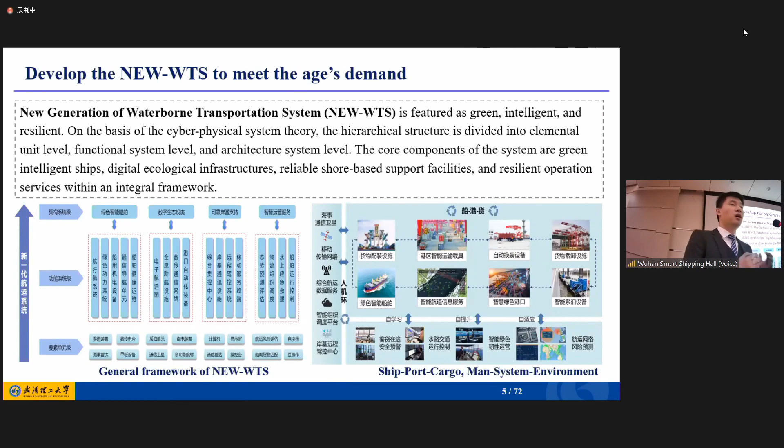From our university, Wuhan University of Technology, we expect to develop a new generation of waterborne transportation system that is green, intelligent, and resilient. We would like to share all the data among the ships, ports, and terminals, and break the barriers between these systems. We have to merge them all instead of setting up different small, separate systems.

With this expectation for shipping, we also have to know why we want to develop intelligent ships - what are the driving forces behind these technologies? We would like to develop intelligent ships to increase the interest and decrease the cost. We build ships or increase shipping to earn more money, to develop transportation and the industry. How can we reduce the cost, and how can we move people from the ship side to the shore side - that's something we need to address with intelligent ships.

In the future, we would like to move people from the ship side to the shore side, to give people a better working environment. To do so, we have to use remote control technology, etc. If we can move people from ship to shore, we can reduce the physical space needed, like hospitality and living areas for staff, so we can have more space to transport more cargoes.

As long as we can transport more cargoes, we can earn more money and make more profit for shipping companies and industries. On the other hand, with a better shipping system, we can optimize dispatching strategies, optimize the whole logistics chain, increase the usage of waterways and ships, and improve overall logistics efficiency. All in all, we would like to reduce cost and staffing needs by using remote control technology.

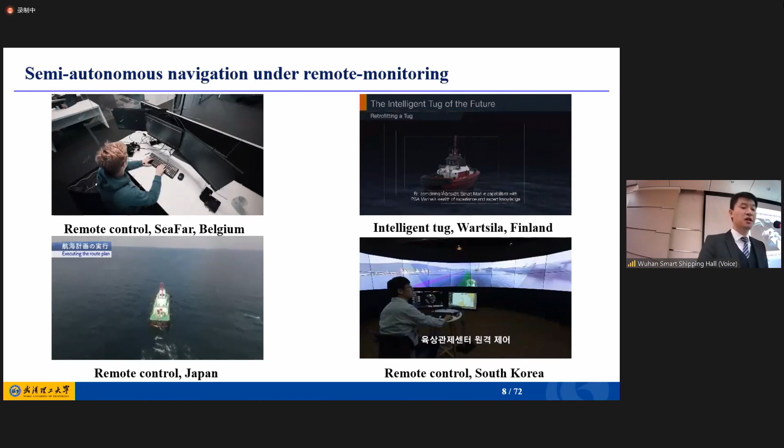Worldwide, all the researchers in this field are quite fond of these nice, beautiful ships for the future, remote control, autonomous control. Our colleagues from worldwide, like Belgium, Finland, Japan, South Korea, have done a lot of work for different types of ships and different scenarios. So what have we done for testing of these kinds of ships?

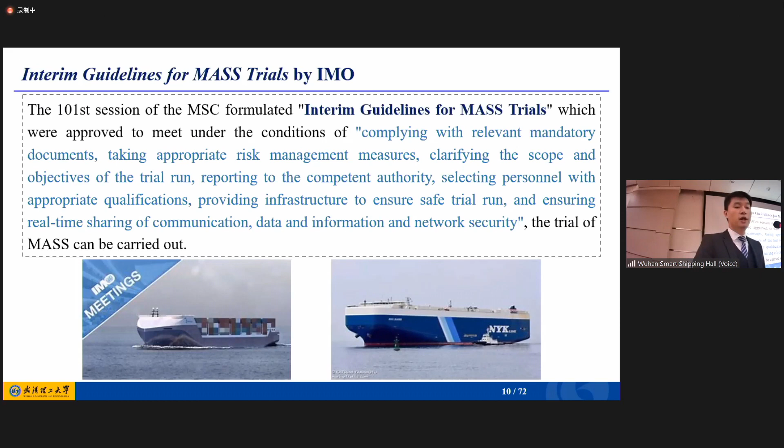Some work has already been proposed by IMO, like the guidance for MASS trials. For MASS trials, we have to be safe first of all, and we have to do some communication between different joint parties. With the IMO guidance, a lot of test beds have been constructed worldwide in different countries and different areas and sizes.

In China, we also have a lot of test sites in Zhuhai, Qingdao, Dalian, and so on and so forth. And yesterday, a nice presentation was given by Professor Kim from Korea on the autonomous surface ship project, the KASS project.

In the KASS project, they have a nice project structure, and they proposed a virtual simulation test bed and a sea test bed, both for virtual simulations and for real practical applications.

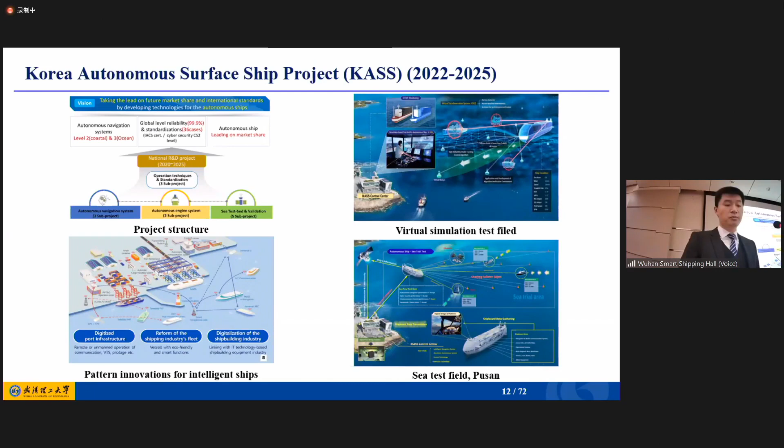But testing is not something new. It's already something that has been done for autonomous cars. Nowadays we have Waymo, Tesla. In China we have Apollo, Huawei. A lot of companies are doing these tests.

But we have to know that we also have to learn some lessons from testing for autonomous cars, because field tests, using real cars to do the test, is fundamental, but it's not everything. It doesn't suit every case, because you may have a million cars with the same size and the same brand, but you cannot have similar ships. Each ship is actually different, in different scenarios and different cases.

We learn a lot of lessons from testing of autonomous and automated cars. We have to set up scenario-based testing and functionality-based testing, which means we design some scenarios for different perspectives, like navigation or collision avoidance. We also have to design functionality-based testing—if you want to test the function of a radar, or the function of a controller, and so on.

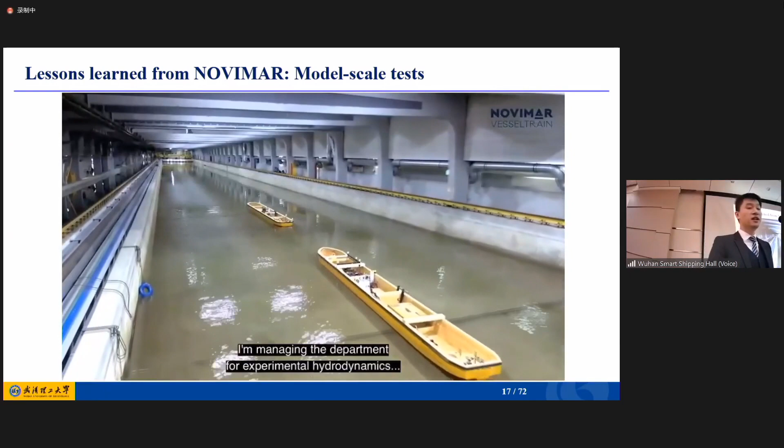After proposing this concept, some virtual simulations were done by MARIN and other partners, using software-in-the-loop or hardware-in-the-loop simulations. Afterwards, some model-scale tests were done by DST in Germany, and these model-scale ships were tested in the towing tank, where you can see the two ships following each other.

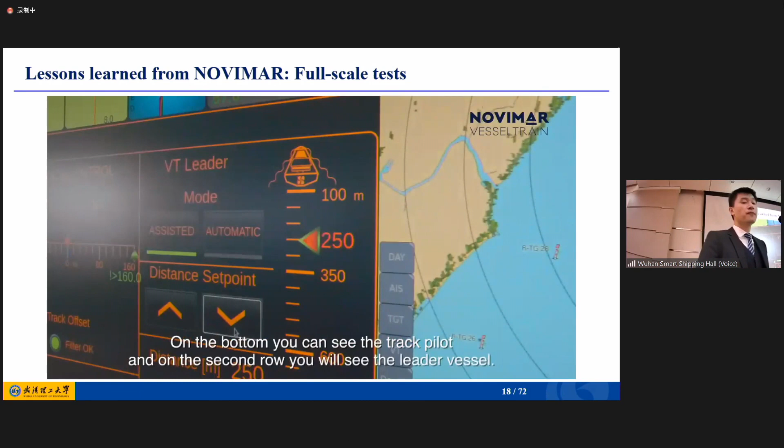In the end, the NOVIMAR project ran some full-scale tests with cargo ships, and one cargo ship with another cruise ship. So all in all, they proposed the concept, set up some virtual simulations, did some physical tests with model-scale models, and in the end ran some full-scale real ship tests.

In the third part, I would like to tell you something about testing for intelligent ships—what techniques, what software, and what hardware we need to use for testing.

In China, at least our group, we focus on testing based on the Rules for Intelligent Ships 2020, proposed by China Classification Society, the CCS. They have already set some functions or requirements for different functionalities of intelligent ships, like smart navigation, remote control, or autonomous control, etc. That is the foundation for our testing.

We also have some challenges and problems for testing. How can we secure safety?

Because you may test a ship with some software that you don't know, how can you guarantee the safety of your own ship and the environment around your ship? How can we improve the efficiency of testing? Because real ship testing can be really, really expensive.

We also have to reduce the cost and increase the coverage to guarantee all the tested scenarios, different ships, different ship types. We also have to improve the reality or fidelity of your simulations. We also have to consider some emergency considerations. If something goes wrong, what should we do? With all these challenges and expectations, we have to think what techniques we have nowadays.

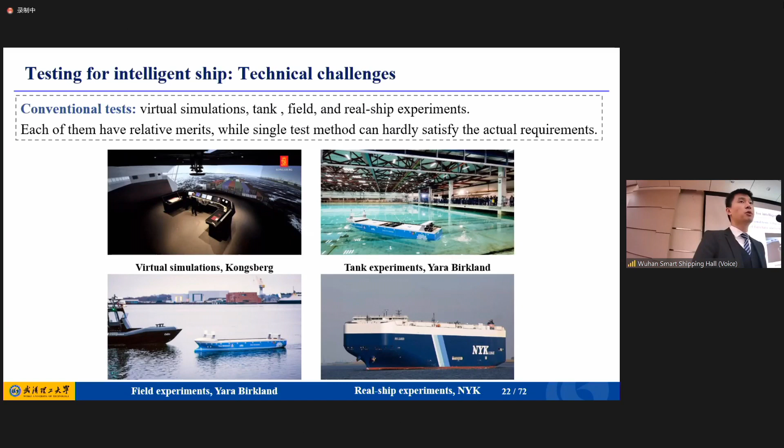So, we propose some concepts. How can we do the testing for intelligence? First of all, you have to do the test. It's something 0 or 1. Do you have a real function here, like course planning, course keeping, avoidance decision? If you have this function, it's 1. If you don't have it, it's 0. On the other hand, if you have a lot of functions, all these functions can be merged together to form some task-level functions. You can merge course planning, course keeping for autonomous navigation, etc.

Moving forward, you have the method level. If you want to fulfill the task, you may have some maneuvering models, course planning algorithms, control algorithms, etc. You have to verify this method. It's a yes or no question. Furthermore, you have to do the evaluation. Is that good or bad? Is that smart or not smart? So for the performance level, you have to consider the algorithm accuracy, the functional switch, navigation safety, efficiency, etc.

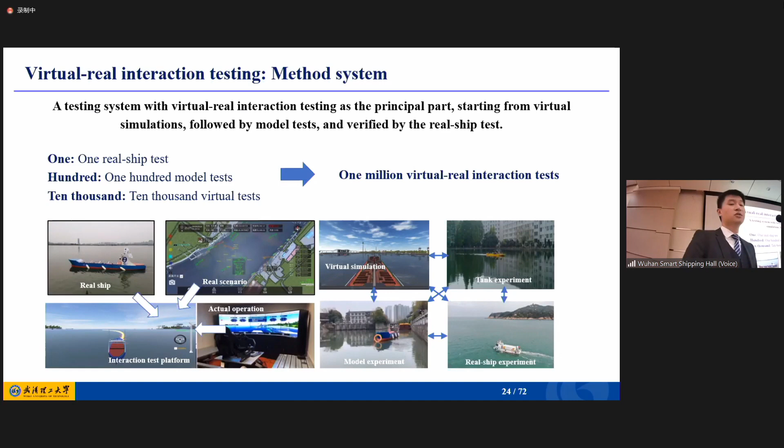So here in Wuhan, we propose virtual-real interaction testing because, like I said, each virtual simulation or full-scale test may have its own cons and pros. So we expect that we do 10,000 virtual simulations, run 100 model-scale tests, and in the end, we run one real ship test, and we merge all the information and data we generated during these simulations or tests to have this kind of 1 million virtual-real interaction tests.

But we have to consider what we test and what we don't test. We may focus on the autonomous navigation system and the communication network. We test the software and the hardware during the navigation areas. We do not test the parameters of the sensors. The limitation of the sensors will not be tested. We won't test the human factors in this kind of operation.

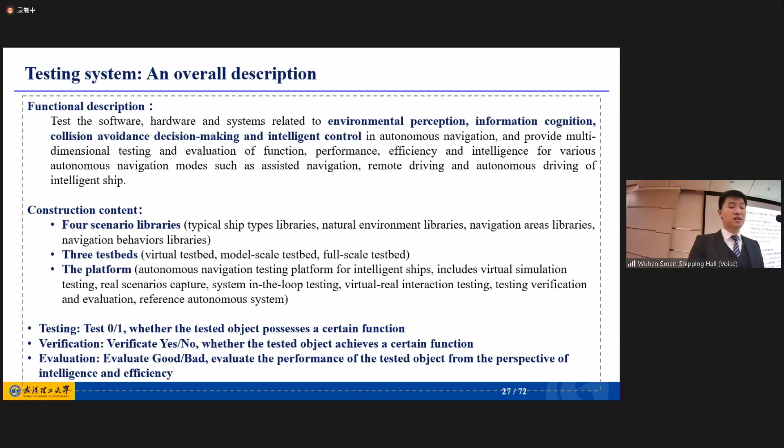So in the first part, I would like to tell you something about our in-house system for testing. There are a lot of words here, but all in all, we would like to generate 4 scenario libraries for typical ships, typical natural environments, navigation areas, and navigation behaviors like crossing, overtaking, etc. We would like to build up some test beds, like a virtual test bed, model-scale test bed, full-scale test bed. We also would like to construct one platform to merge all these scenarios and test beds. So these are the components or structure of our system.

You have different ships, different natural environments, wind, current. You have straits or near shore, coast, far sea, and you may have different behaviors, crossing, overtaking, and you have different test beds. You can use different test tools, and we develop our own models, our own navigation system to connect with other software. You may use software-in-the-loop, hardware-in-the-loop, human-in-the-loop testing methods, and you run some evaluations and display your results. This is the concept of the components of our system.

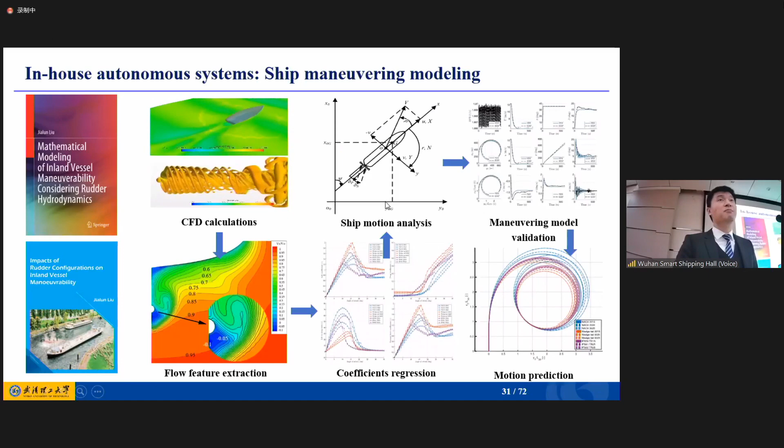How can we do that? We have 6 steps. First of all, we would like to build in-house software to run the autonomous navigation. So we develop the system from maneuvering modeling. You analyze the hydrodynamics, you build the models based on which you know the forces and the motions of the ship. We design the structure of the functions.

You have to use some data from the ship and the weather. You design the controller and the collision avoidance system. You have the PLC controller to connect your system with the actual propeller and the rudders. We also design some route planning and efficiency evaluation for long path evaluation, like the weather routing, etc. You have to consider the fuel consumption.

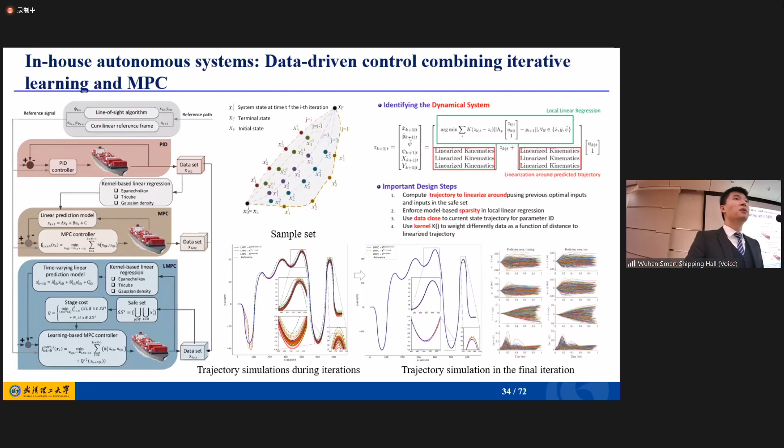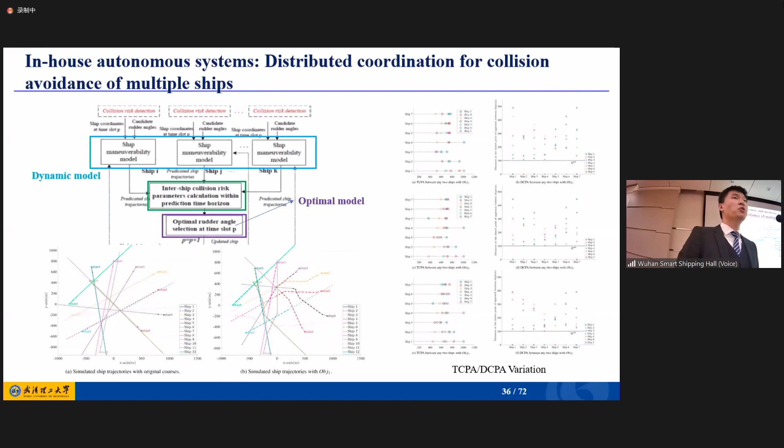And we analyze a lot of different control methods, like the traditional PID or MPC methods. We also use some learning based methods, like the learning based MPC, or the Koopman operator, or dynamic mode decomposition, all those kinds of learning neural networks. So with different control methods, we can also do collision avoidance among multiple ships, because 1-to-1 is easy, but 1-to-3, 1-to-4, or 2-to-2, all those kinds of scenarios are quite challenging.

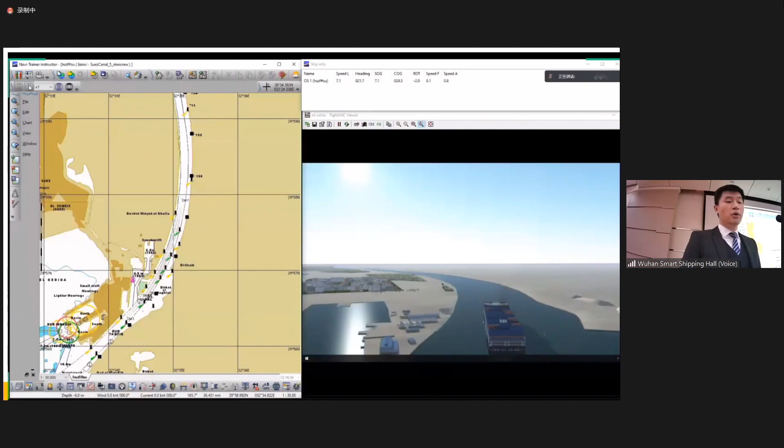And this is the result we analyzed. As you can see, we still have some pitfalls in the system. The speed of the ship decreases, and we use the rudder like 4 times more than the real captain does. So we control the rudder like 200 times, but a real captain will only use the rudder like 50 times. So the system is not yet smart, but it's functional.

Second part, we have to analyze the testing scenarios. For testing scenarios, we can set some testing scenarios based on the exhaustive method. You can list all the possible cases. You may also set up some extreme scenarios. You may set a scenario based on navigation practice. And we have to select and make some drawings from these kinds of scenarios.

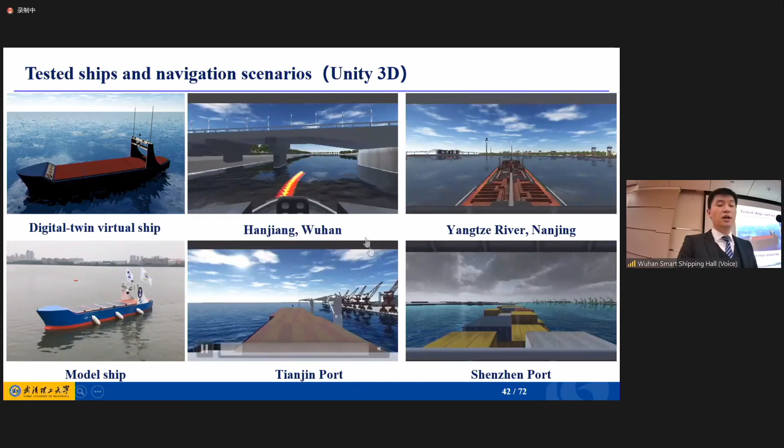This is some scenario we build with Unity 3D with visualizations, like the open sea or the towing tank in Wuhan University of Technology, some inland testing scenarios or offshore testing scenarios. We can also build this kind of digital twin virtual ship. And this is the model scale ship. These kinds of simulations can be performed with our Unity 3D in-house software.

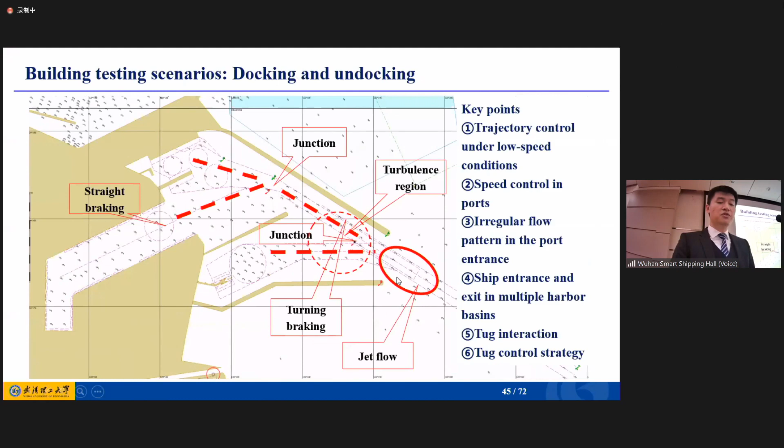We also have some scenarios set up based on the real inland waterways, like somewhere in the Yangtze River, where you have the ferry line, you have the bridges, you have large course changes, and we can also use the Transas NT Pro 5000 software to run these kinds of simulations. And another case is for the harbor entrance and the docking and undocking. You have junctions, you have disturbance from jet flow. This is also quite challenging. And we can perform this kind of simulation to see if you can control a ship into the harbor.

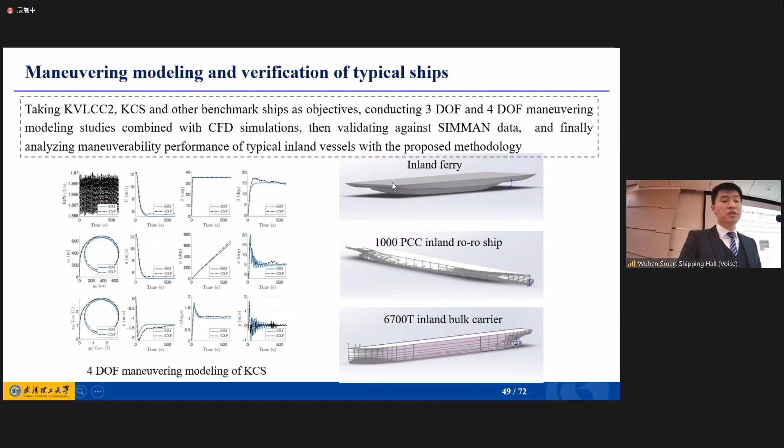So after the scenarios, we have developed testing tools. We analyze a lot of different ship types: inland vessels, ocean-going ships, tankers, cargo ships, containers. We build the mathematical models to provide the motion predictions, and for simulations, we have this Transas marine simulator for full mission simulations, and we have full benchmark ships for different types of ships and different scenarios.

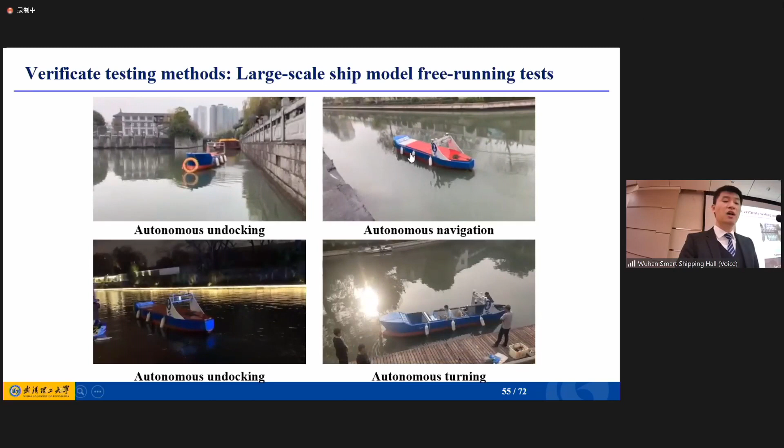And in the end, we have to verify the methods. We constructed a lot of different model scale ships. We have 5 ships: tankers, inland containers, ferry boats. And we have the tugs, inland containers. This is something we do in the towing tank in our university. We run some model scale tests in Nanjing. In Nanjing, the Qinhuai River is a famous place of interest. We do docking and undocking and autonomous navigation tests at model scale.

We also have to propose the evaluation method to compare your system, the software, with the human. Is your system smarter than people or not? So it's a qualitative evaluation. You also have to compare your system with other people's systems. Is your system better or worse than the others? We have to use some kind of evaluation method to give a score or a result. How much score can you get? We propose this kind of Turing-based evaluation, which is traditional for testing an AI.

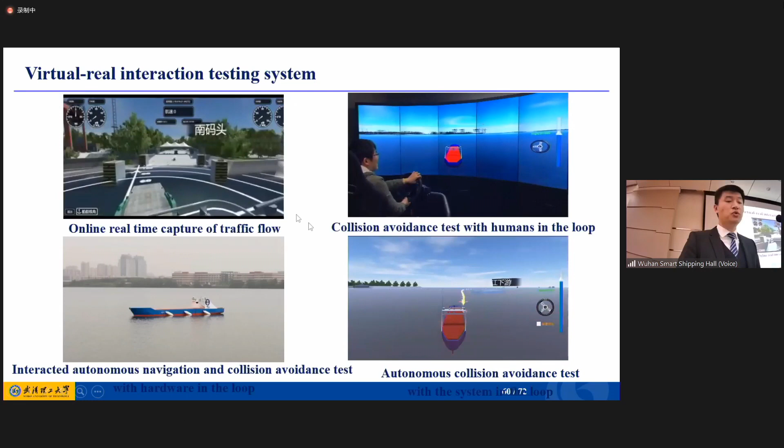In the end, we propose some demonstrations. This is a PhD student in our group. He is driving a ship through this waterway, avoiding other ships. If he can sail this ship safely, he is a good captain. If our system can sail the same ship in the same environment safely, the system is roughly okay, or at least okay for this scenario. That's something we do in the end for this kind of virtual-real interaction testing.

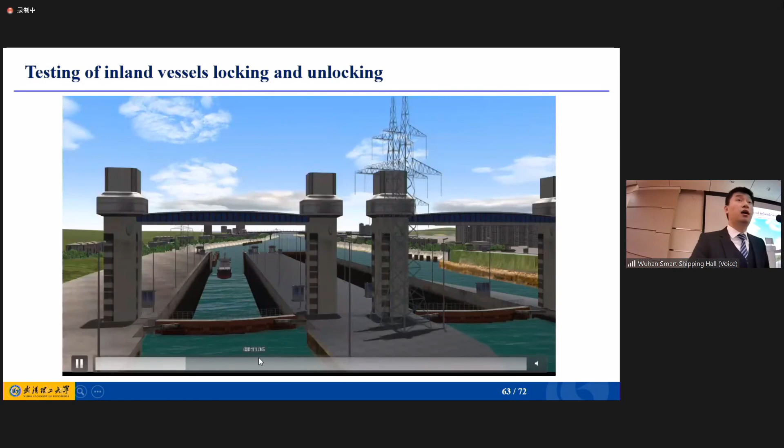And this is also something we do with the simulator. We use different test scenarios for locking and unlocking. We use something like the ship's vessels entering the lockage. You can also test your algorithms to see if you can do this job. And we can also maybe perform some kind of formation control test. You have different boats, and how you can test your algorithm is also something nice we would like to do.

And in the end, we still have a lot of pitfalls. All those points are something where we are worse than the commercial system, but we also have some flexibility compared to the commercial systems. All in all, we have already had some good results, some publications, monographs, and a lot of PhD students and master students are working in this area. We are supporting a European Horizon 2020 project called SAFEMODE. Using our system, we will run some tests for operator assessment of remote control ships.

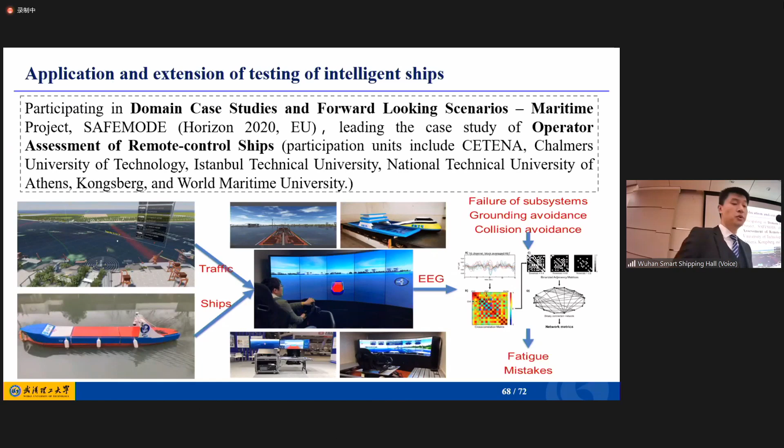And this is the last slide in my presentation. We have some experience. If you want to test your ship, you have to know how to design and construct an autonomous system. It's strongly connected to each other. If you don't know how to design the system, you don't know what you would like to test. And in the end, for the researcher on testing, we have to answer the question: is your system safe enough to drive a ship? And how much work can the system do for humans?

And we are experiencing a lot of opportunities, because nowadays we all want ships to be green, intelligent, and safe. So there is a lot of work to be done. We have a lot of new research areas like remote control, unmanned control, autonomous control, ship-shore coordination, formation control. A lot of work has to be done. And testing is something really connected with our R&D and device design.

And in the end, we also have a lot of challenges. There is a lot of work to be done for testing. We need a lot of time, a lot of money to be invested in this area. There are a lot of difficulties in modeling, testing, scenario definition, scenario selection. And we also have a lot of difficulties with communication and collaboration. We have to understand other parties, how do they design their system? How do they think about autonomous systems?

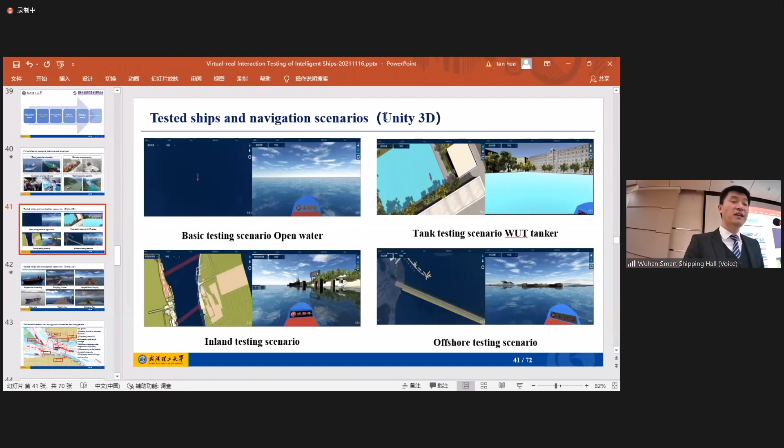Actually, I cannot give you an exact number because we design the scenarios for different purposes. Actually, we have two kinds of systems. One is with Unity for visualization, developed by our own. So in this system, we have like 6 or 8 scenarios. These are 4, and these are another 4. And for some scenarios we constructed with the simulator system, there are hundreds like that. We can set up the scenarios as we expect. So actually, there are a lot. Hopefully, I answered your question.

That's okay. So I have one question to add to his comment. From my point of view, and maybe from your point of view, how many scenarios do we need to carry out to test and prove the system's capability? We need to test to check the autonomous system and the collision avoidance system.

Thanks for the question. At least from my perspective, I would expect at least one or two full-scale experiments as the final stage for testing a system. But before that, we would like to do at least about 10,000 simulations virtually with a simulator or an in-house system. And you may reach 10 to 100 model-scale tests to verify the results of your simulations and to connect the data from virtual simulation to full-scale experiments.

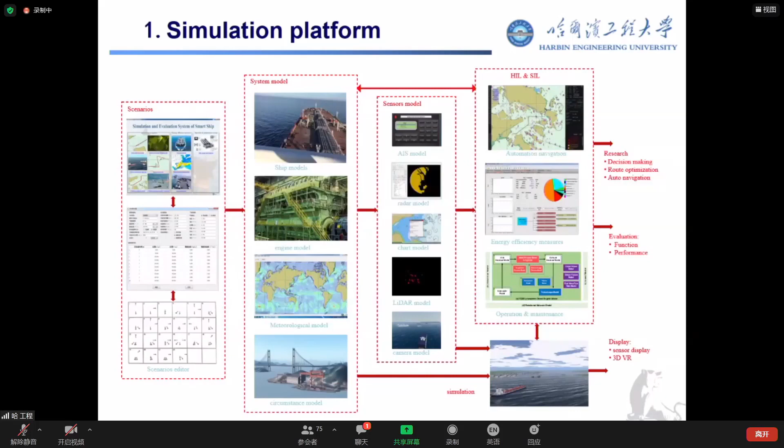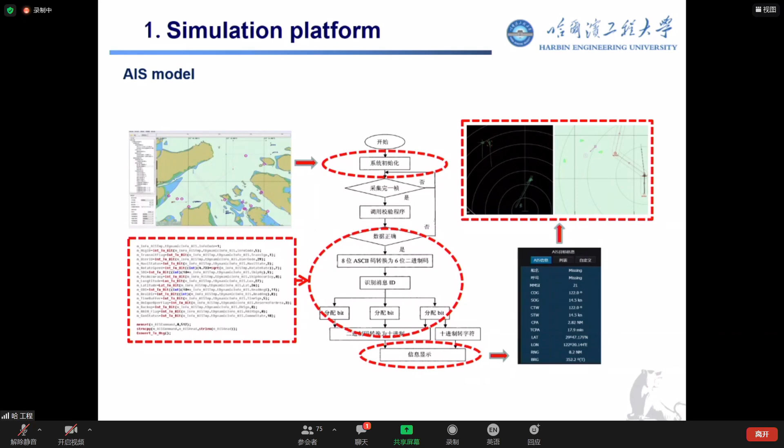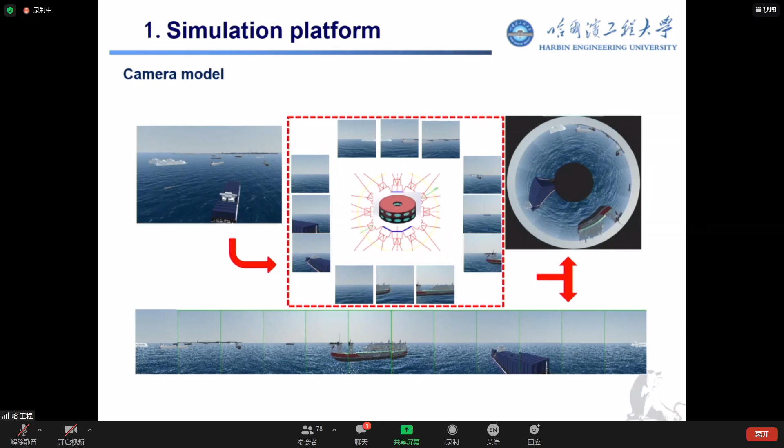The second part, I will introduce some test equipment developed by our team. The first is the omnidirectional vision system. We use 12 cameras and 12 infrared cameras joined together like this. We have designed a special embedded system for image acquisition and processing.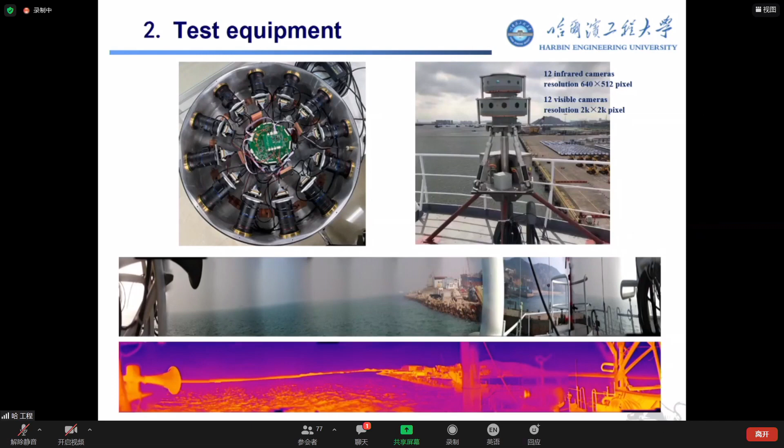This is the final omnidirectional imaging after stitching. We can see that the stitching algorithm needs to be continually updated. Okay. There are some application algorithms and programs developed based on the panoramic vision system: object recognition and classification, and image enhancement algorithms for rainy and foggy days. In sum, this is the continuous work about image processing.

Another equipment is about LiDAR, panoramic LiDAR. We use a LiDAR with 128 lines. The vertical angle is about 12 degrees. The range distance is about 2 nautical miles, with a 2-layer receiver. We used more than 2 years to develop the system, and now it is in the testing stage to test the performance of the system. At the same time, we have developed software for object detection and classification under the point cloud.

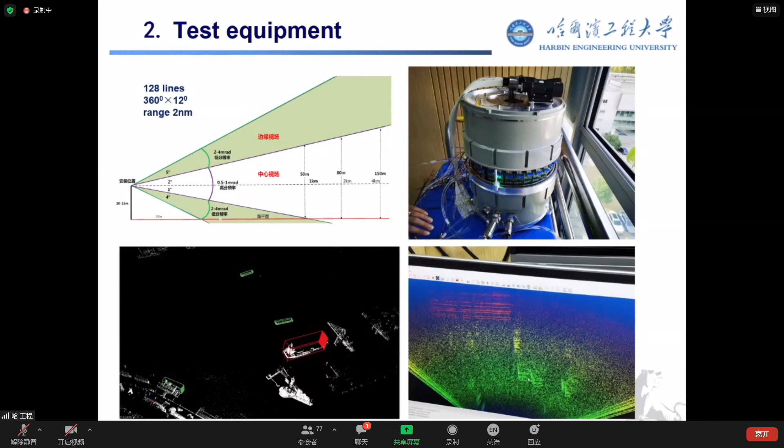And this is another kind of LiDAR system with a narrow view angle, only 2.56 by 2.56 degrees, and with 64 lines. The ranging is also 2 nautical miles, just in testing. With this electro-optical system combined together, we can realize more detailed object detection and classification. Okay.

Another important equipment is that we have built a new ship. This ship belongs to our team. It has some advanced devices, for example, a differential positioning system, optical fiber INS, DP system, active roll reduction system, engine fault diagnosis system, the situation awareness system, remote control center, and autonomous navigation system. All the systems were developed by our university. Okay.

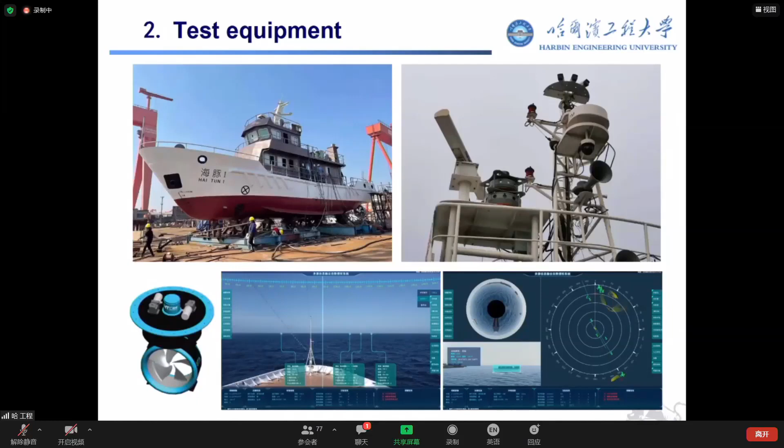I think that remote control is a more effective control mode today. So we have built 2 remote control centers, one located in the Qingdao campus and another in the Harbin campus. And 2 harbors and docks in Qingdao and Yantai can provide the test circumstances. Okay.

The third part, a very interesting problem, is about the control algorithm. This block is about adaptive control, heading adaptive control. It's a structure of hybrid model reference adaptive control and self-tuning control. Here shows the result of the controller for heading keeping and heading changing. Statistics about the result, about accuracy, rudder angle changes under different states, show it is an effective controller.

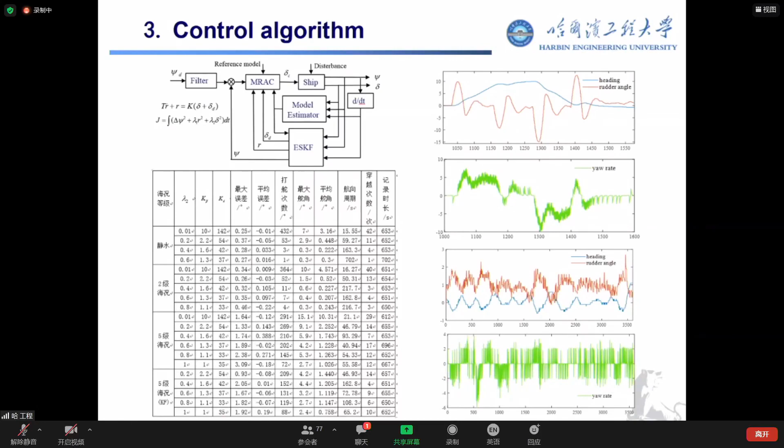And the other part is a virtual entity, a computer-generated representation of the real system, for example, simulation, modeling, optimization, data management, etc. We have just introduced two parts. One is the test equipment, as the physical entity. And I have introduced the simulation platform as a virtual entity. So we have the conditions to do research on digital twin systems.

There are two direct connections. First is from the physical entity to the virtual. We can use the physical-to-virtual connection to optimize and update the virtual system. The other connection is a virtual-to-physical connection. It's very important. It closes the loop between hypotheses generated in the virtual and the real entity. So effectively, the digital twin with both connections generates hypotheses and subsequently performs tests and adjusts the hypotheses in a continuous adapting and improving cycle.

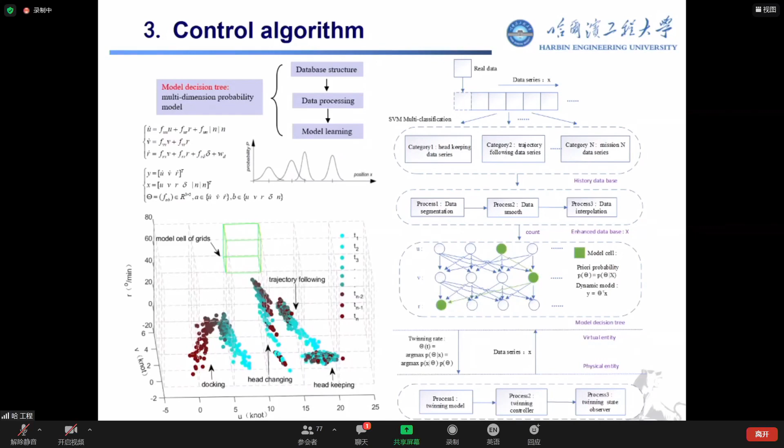This is the new idea for the effort. That's all about my report. Thank you.

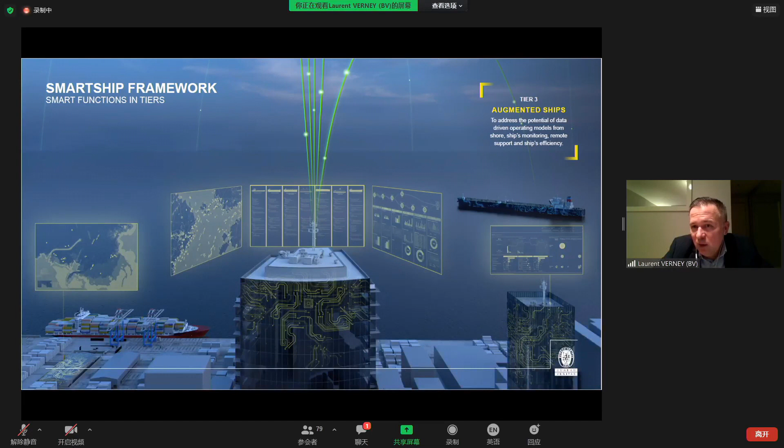After that, what we consider as the third tier is the communication in the opposite direction. It means that you are able to bring some support, but the support is not from the crew, but from the shore this time. This is what we call remote support, or what can be summarized as augmented ship. And then, when this support - I mean the prediction and so on - can be directly provided by the system on board, this is for us when the ship becomes really autonomous.

In order to rephrase all this, I will try to re-explain the 4 tiers in one single slide. As you see, to reach the autonomous level, you need to have real-time monitoring on systems, be able to have some predictive capability, some automation on board, and of course, the relevant remote access.

So to do that, first you need a computer-based ship for the collecting of the data. Then this data is transferred as your ship is confirmed to be a connected ship - you have the arrow in green with the transfer of all the bytes to the shore. Then all this data is analyzed in order to make some prediction and bring some support from the shore, rather than from the ship. This is the yellow arrow with some remote operation.

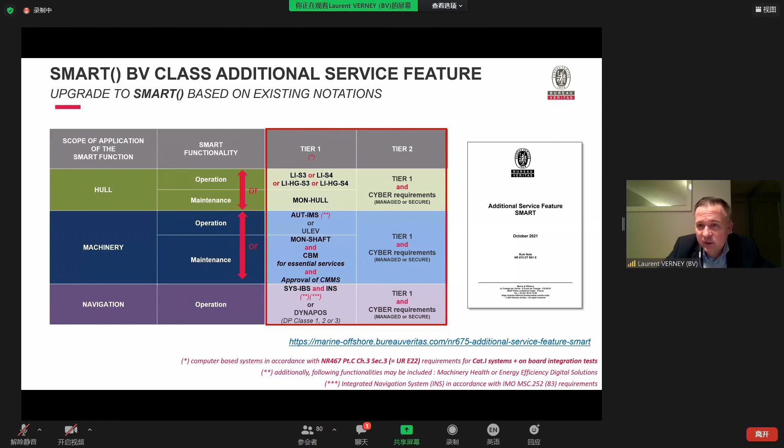Finally, since tier 3 and tier 4 are not yet published, all this will rely on the project you are currently delivering, or the research project in which we are involved. To give you some indication of what we can deliver on the R&D projects you are involved in, I would like to first present what we did with Seaowl about their concept, which they call ROSS.

ROSS means Remote Operated Services at Sea. Again, there is a link on our website to see the approval in principle delivered this year to this ship, dedicated to support at sea. We have completed the first phase, the proof of concept phase, and we are starting a new one in which the French flag will be involved, because it's important to be in line with all the statutory requirements and what may be proposed by the IMO.

So this is an example of the real development project that may exist for tier 3, I mean for remote operation. For the fourth level, the ultimate one, the fully autonomous ship, it will of course start with smaller ones.

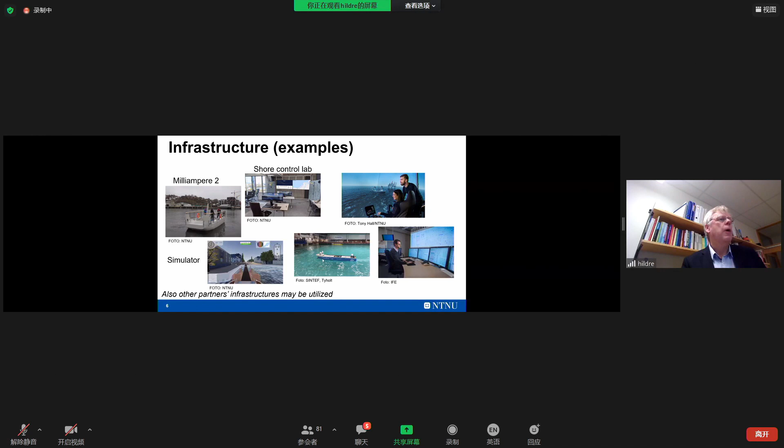There are 4 use cases: deep sea bulk shipping, short sea container shipping, urban ferries, and offshore support operations. Simultaneously, we are also building a lot of infrastructure at universities and research centers to deal with these challenges. Here are a few pictures from SINTEF, from NTNU, and so on. This is one of the examples, Yara Birkeland. It is a container vessel. I can show you a video.

This container vessel will replace trucks. That is transportation between two harbors like this. And it is an autonomous ship that will replace this huge traffic between these two points. And the ship is designed, equipped, and it will be up and running from next year.

It is 100% electric. It will be without any manning. It will be manned in 2022, but later on it will be without any people on board. And even the harbor operations and everything will be automatic. This is a kind of significant research project put into practice between these harbors actually.

And you can see it is fully automatic between these harbors and so on, with collision avoidance and all these sensor systems and so on introduced. This video is also on the net if you want to go deep into what they are doing and so on.

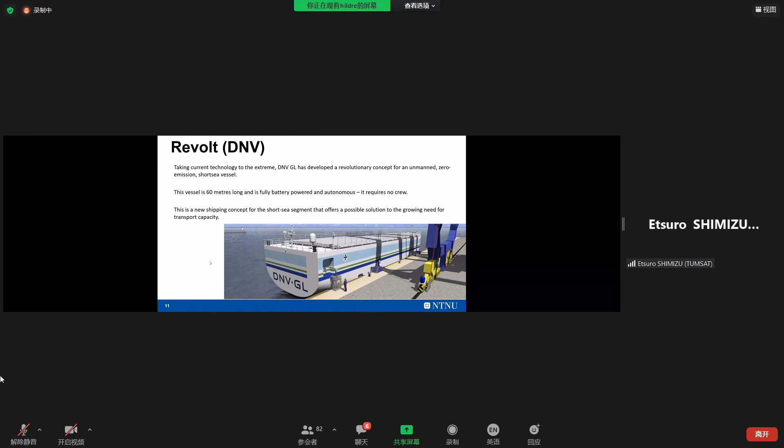Thank you. This is another example from DNV. This is also a kind of revolutionary design, an unmanned, zero-emission short sea vessel. This is a 60-meter long ship that is in research. Then there are quite many research projects ongoing, making these smaller USV ships that are in testing in the fjords around Norway, testing verification and functionality of autonomous ships. I think there are 5-6 projects like this in Norway at the time.

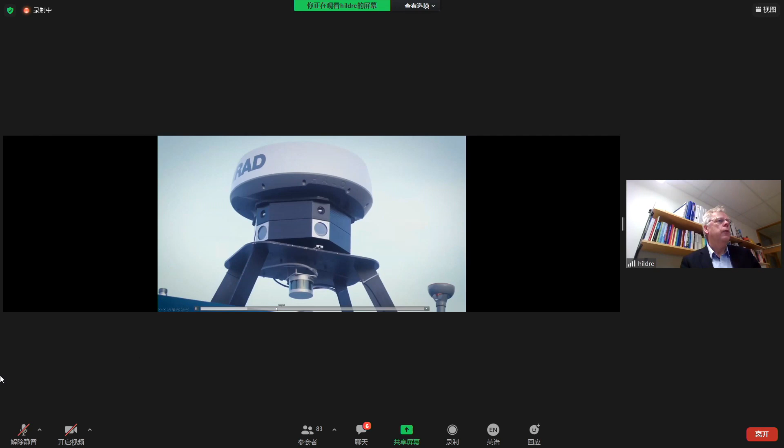This is a project called Zeabuz. It is a zero-emission autonomous urban mobility. The idea is that it is quite expensive in bigger cities in the harbors, and how we can make urban mobility in this. And this is also built and tested in Trondheim. So it is a ship that is moving back and forth, and it is up and running in Trondheim harbor at the time. So I think it is very important to do this type of testing and verification.

As you know, the IMO definitions of autonomy have four levels, and in the first two levels the people are on board. In the next two levels the people are not on board. Now we have been working on digging more into these first two levels. If you have an axis of time and an axis of number of ships, I don't put an exact time frame on this, but I think it is quite obvious that the most development in number of ships will be in level 1 and 2.

Level 2 is remotely controlled ships, but with seafarers on board, first of all people taking care of the engine systems and so on. The number of ships that are fully autonomous without any people on board, at least in the short term, will be fewer. So now we have been putting a lot of effort into these first two levels.

And we call this how we can get distributed maritime capabilities. What is the crew doing on board and what is the crew doing in shore centers? We call this how we can make these dispersed teams that are partly on board and partly in control centers.

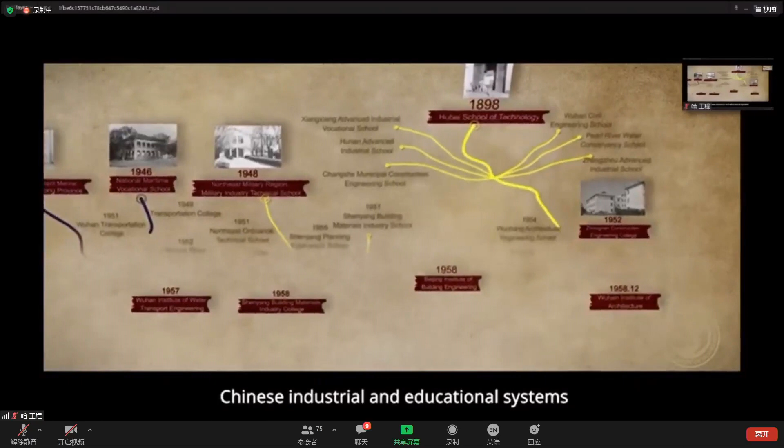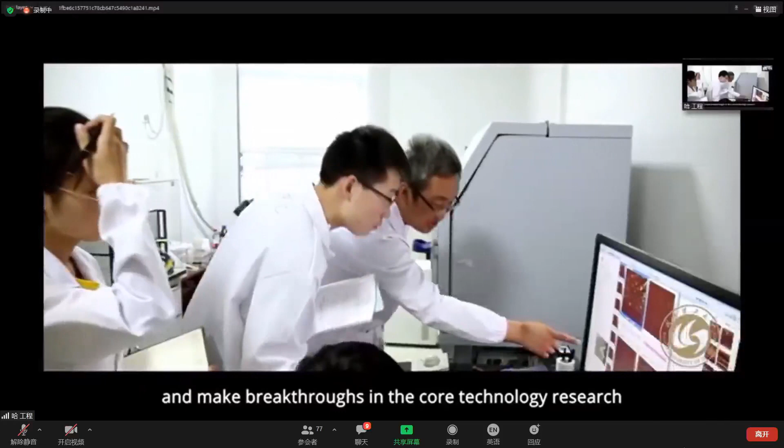Adhering to the concept of technological innovation, efforts have been made to carry out original innovation and make breakthroughs in core technology research. A large number of high-level scientific and technological achievements with originality and social influence have been yielded. A series of original results in the cutting-edge field at the intersection of material science, energy and life sciences have been published in the world's top academic journals and cited by more than 115,000 researchers worldwide. More than 50 research groups in developed countries have followed up on these researches. In 2018, as national statistics showed, WUT ranked 17th in the total number of 3 national awards for scientific and technological achievements among all Chinese universities.

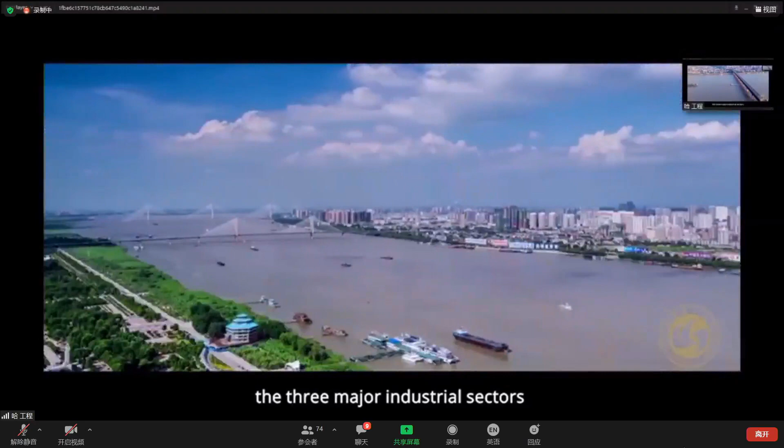WUT focuses on transferring scientific and technological achievements into social productivity. It has made great contributions in serving major projects, the transformation and upgrading of the 3 major industrial sectors, and the development of regional economy and society.

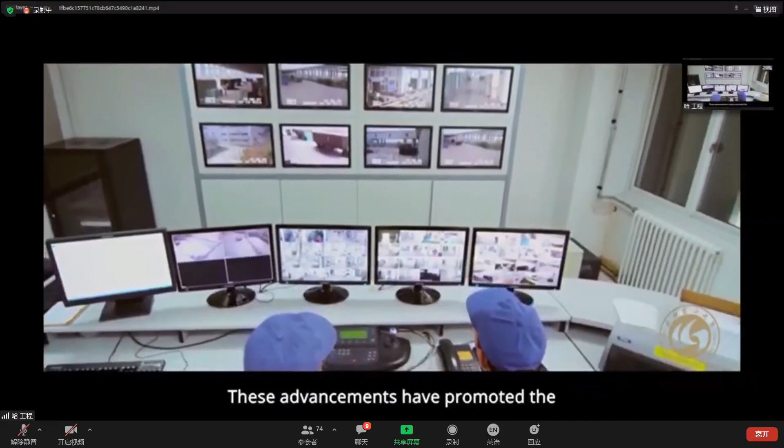A number of important innovations have been achieved in green building materials, new energy materials, electronic information materials, biological materials, and new marine materials. Major breakthroughs have been made in key technologies for the large-scale use of solid waste and domestic waste as alternative raw materials to produce high-performance cement. These advancements have promoted the transformation and upgrading of China's cement industry.

Achievements in key technologies have been widely used in more than 150 major national projects such as large-span bridges, tunnels, high-speed rail, highways, and the Three Gorges Dam, etc., and made significant contributions to the development of China's building materials industry.

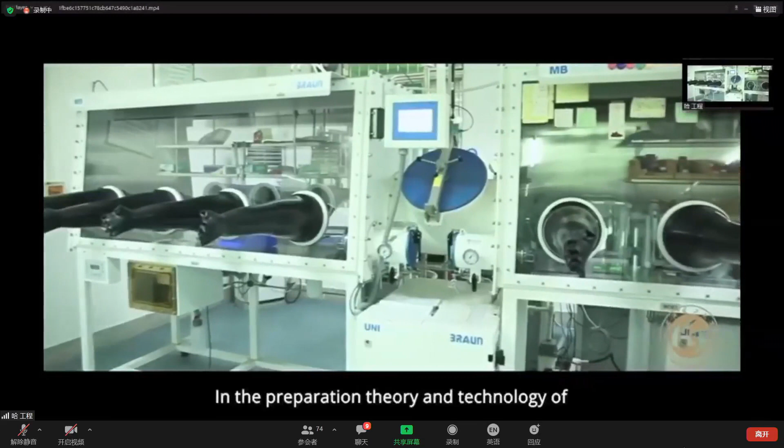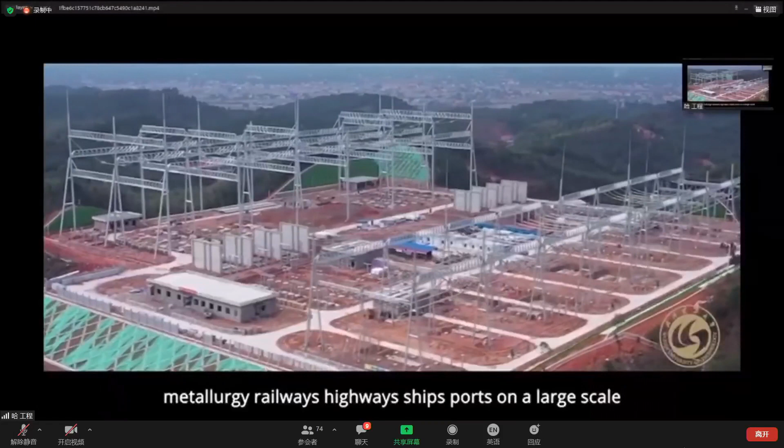In the preparation theory and technology of fiber grating sensing and smart sensing, industrial production and engineering applications, WUT has solved international technical problems and formed a complete intellectual property system. Scientific and technological achievements have been applied to major basic engineering and equipment fields such as chemical industry, metallurgy, railways, highways, ships, ports on a large scale.

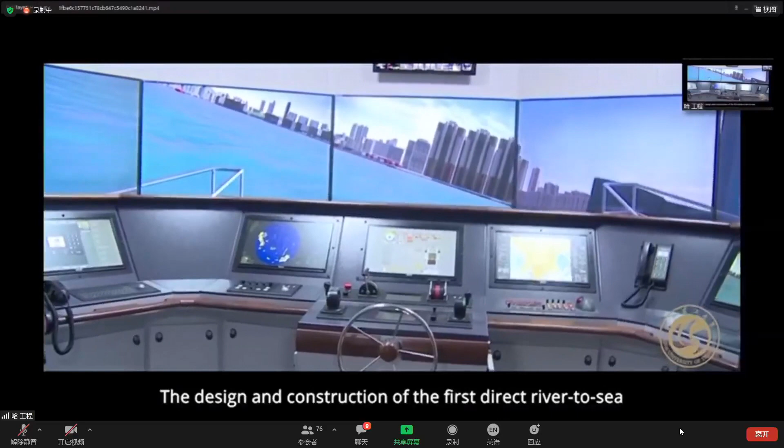A number of important innovations have been achieved in the fields of green smart ships, water and land transportation safety, smart transportation, and smart shipping, etc. WUT proposed and established the navigation brain system of intelligent ship to promote China's ship-driving active safety technology and equipment innovation. The design and construction of the first direct river-to-sea demonstration ship, Han Hai No. 1, has opened the 1,000 boxes era of the Yangtze River inland shipping.

In the areas of automobile lightweight, electrification, intelligence, and networking, WUT has broken through a series of core technologies and promoted the transformation and upgrading of the automobile industry. One of China's first 2 fuel cell cars.

Hello? Yeah. Yeah, we can. Yes, please start. Okay, thank you, Professor. Yeah. The same to you.

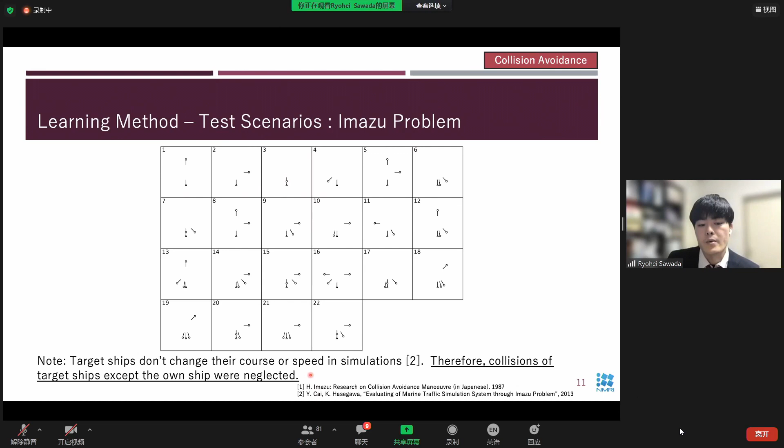We use the test scenario as shown in the slide. This is called the IMAZU problem. The IMAZU problem has 22 encounter scenarios shown in this figure. And in this scenario, target ships don't change course or speed in simulation. So collisions of target ships except with the own ship were neglected.

And I also skip the explanation about the design of rewards in this presentation. So if someone is interested in this approach, please check my paper. Okay.

So I want to show you some demonstration of the trained model. This is case 22 of the IMAZU problem, and there are 3 target ships in this simulation scenario, and here is our ship. Our ship should avoid these target ships and arrive at the waypoint.

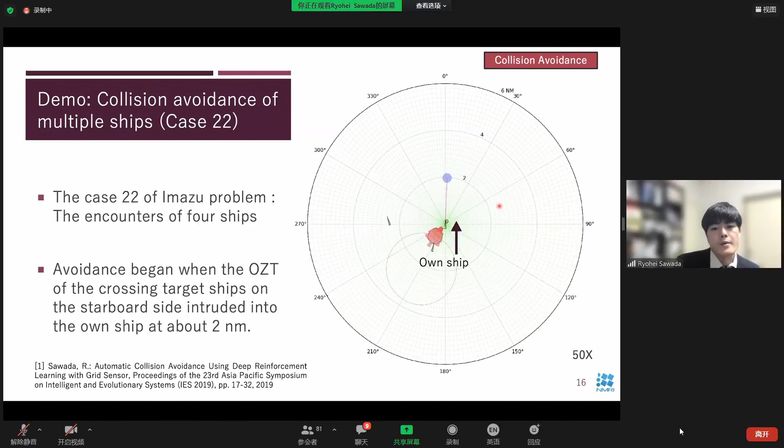In this video, our ship goes to the north, and the view is fixed to head up. The ship turns right to avoid these target ships and goes to the waypoint in this scenario. The trained model by the proposed method can approach the waypoint in this complicated scenario.

Then we improved the model using other network structures and a new calculation method of OZT. I also skip the explanation of the method in detail, but we tested the improved model in the more complicated scenario shown in this figure. There are 5 target ships, and these are the OZT.

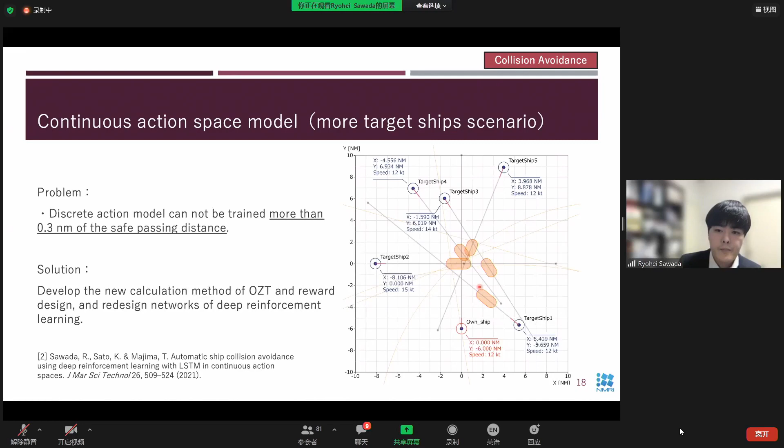Let's skip. The result of the simulation is shown in the right figure. The red one is the trajectory of the own ship maneuvered by the trained model. The own ship can avoid the target ships and arrive at the waypoint. That's all about the collision avoidance research in NMRI. It is done in simulation.

For the berthing control, we use the experimental ship to develop automatic berthing control. The experimental ship was built in 2014 and utilized for studies on a seamless ship system for remote islands and the lithium battery fuel cell ship experiment, etc. in NMRI. From 2019, we use this ship for research of automatic berthing. First, we developed a mathematical model of ship motion to simulate the berthing maneuver.

We use this MMG model, based on the MMG model as shown in equation 1. The comparison of simulation result and experimental result of ship motion is shown in the right figure, and the top shows the trajectory of simulation and experiment results. Then the speed components, surge velocity, sway velocity, and the rate of turn are shown at the bottom of the figure.

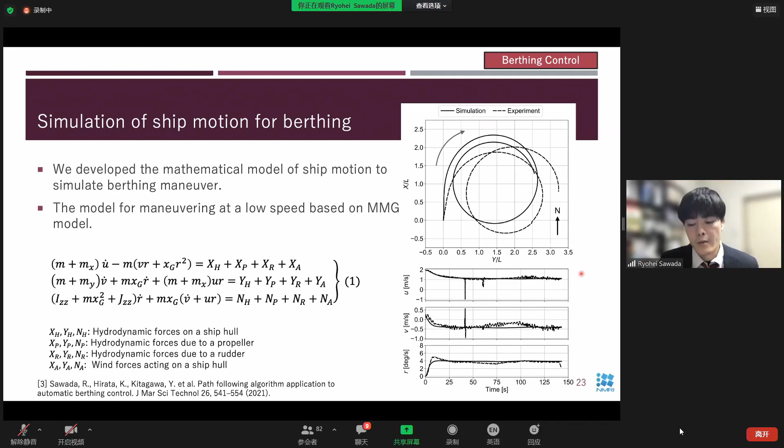The automatic berthing algorithm consists of path planning and path following. The path planning function uses a Bezier curve to represent the approaching path to the berth, and the path following algorithm uses a heading controller known as autopilot and the pure pursuit algorithm to follow the path.

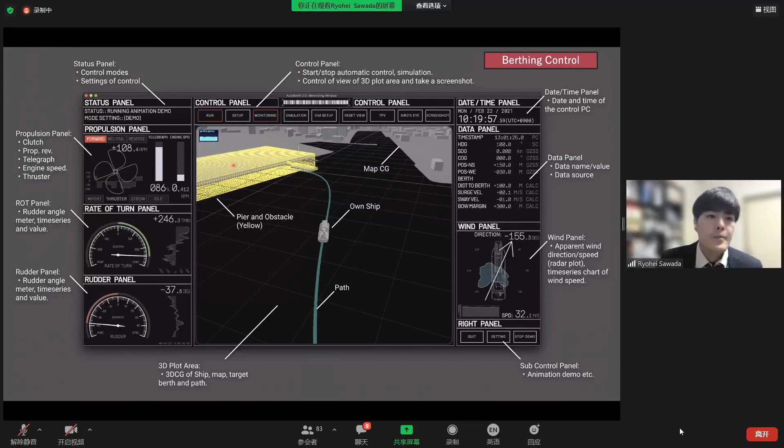Using this UI, we monitor the state of the automatic berthing control, and can stop and run the control. Okay, I want to show some demo.

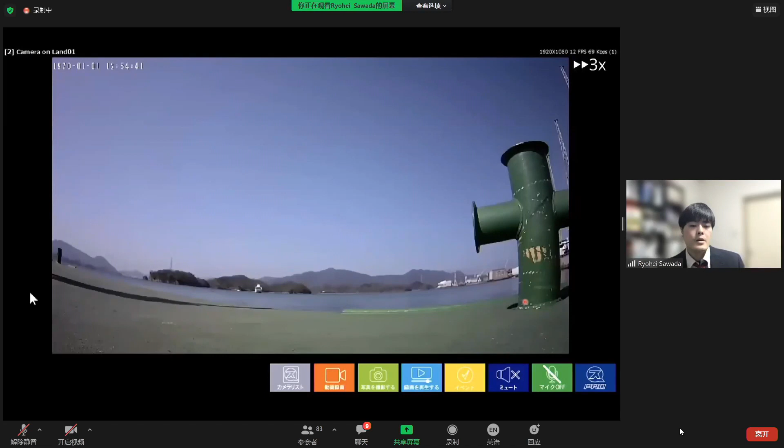This is about the experimental ship, and here is the berthing point, and the ship starts from here, and this green line is the path. The average wind speed is almost 5 to 6 meters per second. For safety, the ship approaches slowly to the berth in this experiment.

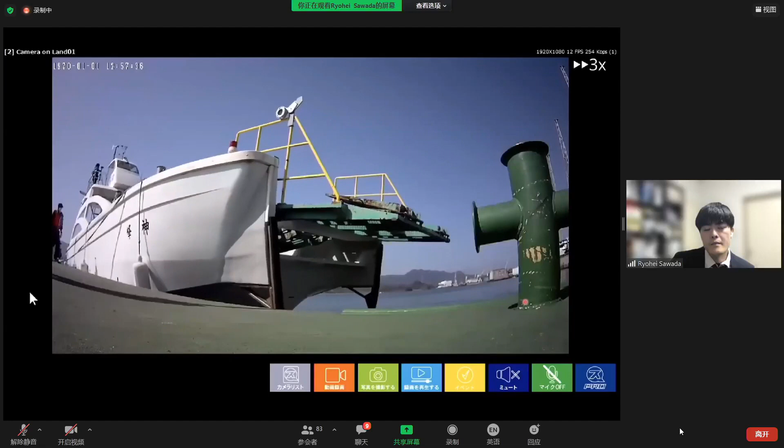That's all for the automatic berthing experiments.

Okay, that's all for automatic berthing control. At last, I want to show you some applications of sensors in autonomous navigation. First, I'll introduce our control system of the experimental ship briefly before explaining the sensors on this ship.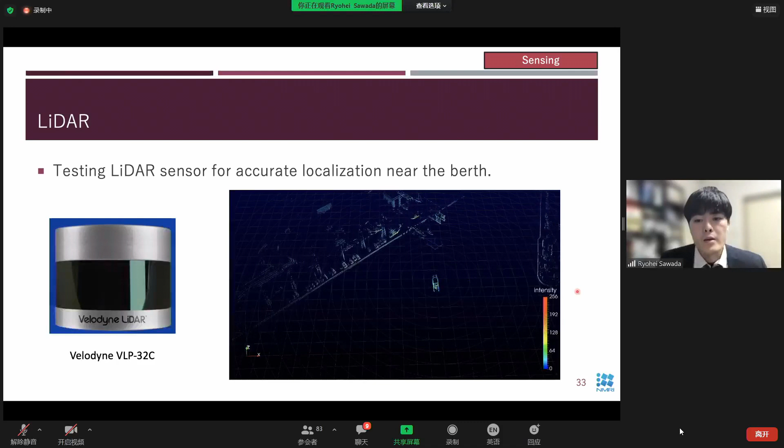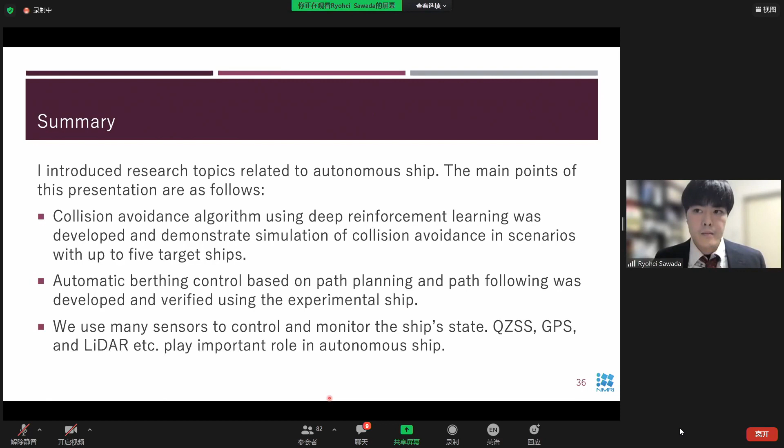I can't hear you. Do you have any questions? Okay, shoot, okay.

On the board there are two questions. Can you see it? The first one is, how does the system handle a ship that might change its speed and course in the future? The second question is, what if the ship is navigating in confined waters? Should the system still work?

Sorry, I can't hear you, please say again. Sorry, Mr. Sawada, please check the chat on Zoom. Yes. Oh, okay. Yes, sorry, for the first question.

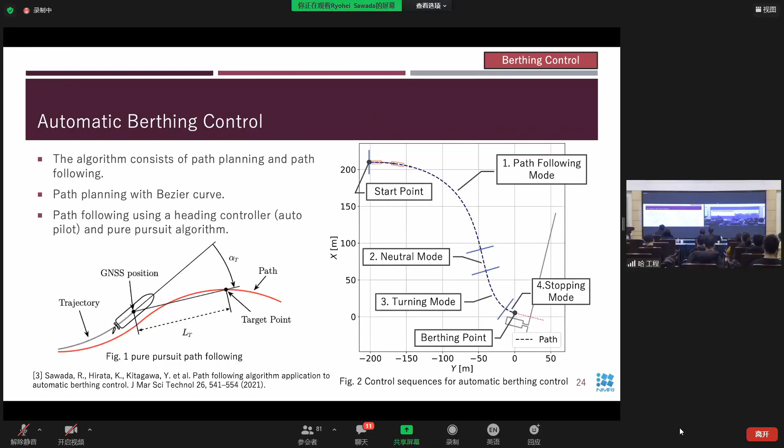I see the result of the berthing is very good, but is the bow thruster irreplaceable, and is it very important for your berthing control? Thank you.

Yes, this ship keeps a bow thruster, but due to the problem of electricity, we don't use the bow thruster in this experiment. But by using this algorithm, we can approach the buoy with only rudder and propeller control. So if it's a more difficult or bigger ship, we have to use a bow thruster for the berthing.

I want to know if the side thruster, in other words the bow thruster, is very important in your control system.

I think it's important, but... Yes, that's right. The function of the side thruster and the bow thruster is the same, used to control yaw rate and yaw angle. So it can be done by using a PID controller or some algorithms, I think.

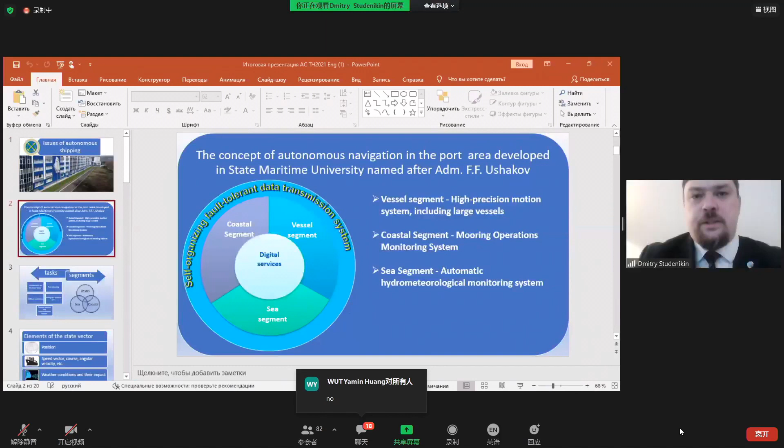So how's this? Can you push F5? I already did that. It's perfect for my screen. I don't know, I'll try to restart the presentation from Zoom. You can close and open it again. One moment, please.

Do you see on the right side, down right side, like a list? Can you open like a presentation? It's a small icon on the right side, down. You can put it there if you don't want to use F5. I already did that, can you see my presentation? Of course we see it, but it's not comfortable because it's too small. Well, I pushed F5.

I am sorry, can I interrupt please? This is Janne from South-Eastern Finland University of Applied Sciences. Could it be the case that you are trying to share a screen when you want to share the presentation, or vice versa? If you have multiple screens, it's better to share the screen and not the presentation application. Okay, I'll try to share the screen now. Please try that, because if you have the slideshow available in one of the screens, that should work.

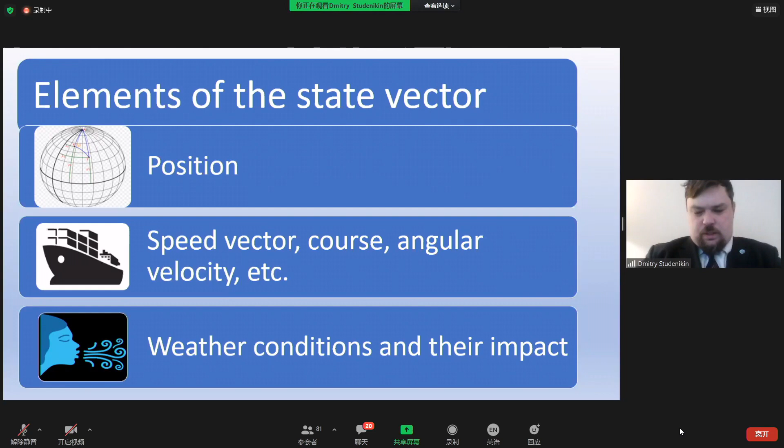Each of these - okay, I'll just shift to the next slide. The task of planning a route is often considered an already solved task. There are various solutions offered on the market, but I'd like to highlight some instances.

It is very important to have the planning from point A to point B. Usually this is referred to as berth to berth in classical navigation. But there are many situations in which it is very important to plan a deviation route, so-called deviation route, and that is the case where point-to-point planning is applied.

Then it is essential to implement assessing the cartographic information and including the navigation support information.

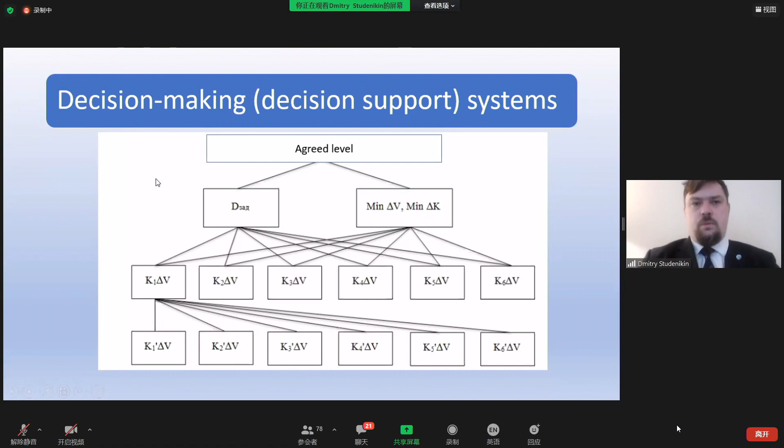So, this approach for decision-making systems resembles a so-called black box system. It is not always convenient for users. The data is submitted to the input, the solution is issued at the output, and what happened to get it remains a mystery of the black box. At the same time, if human intervention is necessary, then for a quick understanding of the situation, such systems should be understandable and transparent for the operator.

Of course, it's too unrealistic to expect a complete standardization of decision-making. There are too many scientific solutions with various approaches to artificial intelligence and decision-making in general. At the same time, it is necessary to carry out work in the field of harmonization of the methods for evaluating support systems and/or decision-making. To do this, it is necessary to develop a widely applicable or universal approach to assessment. It is extremely important to observe the principle of unity of the assessment. The university has its own achievements and is ready to work in this field, however, these are not complete yet.

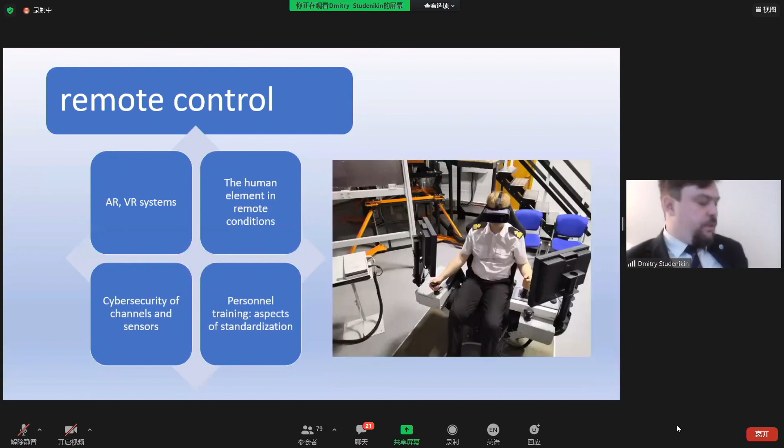In 2020, a consortium of leading transport universities in Russia was created, including our host university, the Russian University of Transport. The consortium areas of work include the following: development of autonomous navigation and maritime transport, and increasing the volume of international scientific and technical cooperation in the field of autonomous navigation.

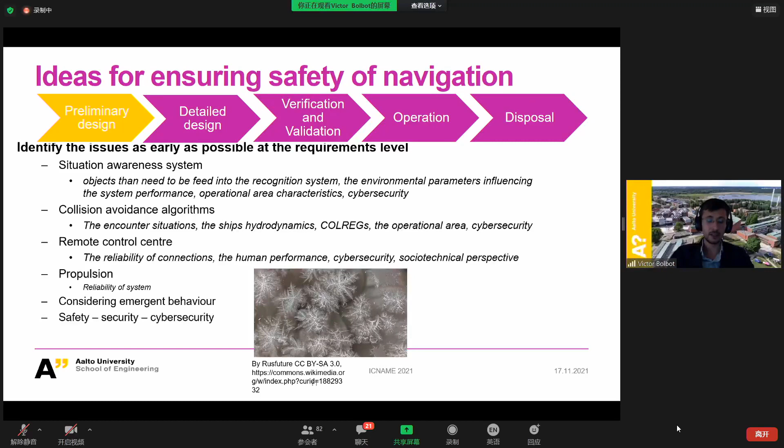And in the past, we have observed some accidents which were attributed exactly to this phenomenon, where we had a properly designed system which was designed according to the law, but because we missed some interactions between humans, organizations, and technology, we had some accidents. Here at Aalto, we are following some specific approaches which support us in identifying these interactions, and we are pushing the research further.

With respect to the detailed design, we need to ensure that the detection system is accurate enough and that the objects are sufficiently and accurately identified. And this will guarantee us that the situation awareness system is working and it can be trusted.

For the collision avoidance algorithms, we need to ensure that the hydrodynamic models are fit for the problem. And here I'm referring to the understanding of ship behavior in weather, wave, and current conditions, and also in shallow waters. Some accident statistics have indicated that most of the accidents are occurring actually under bad weather conditions and bad wave conditions, and when we have strong currents.

While at the same time, the majority of the collision avoidance algorithms are being developed for use in still water conditions and under very nice weather conditions. That's why I believe that it's really necessary to ensure that the simulation testing, which I'm referring to in the next slide, is considering the worst conditions and not the best conditions.

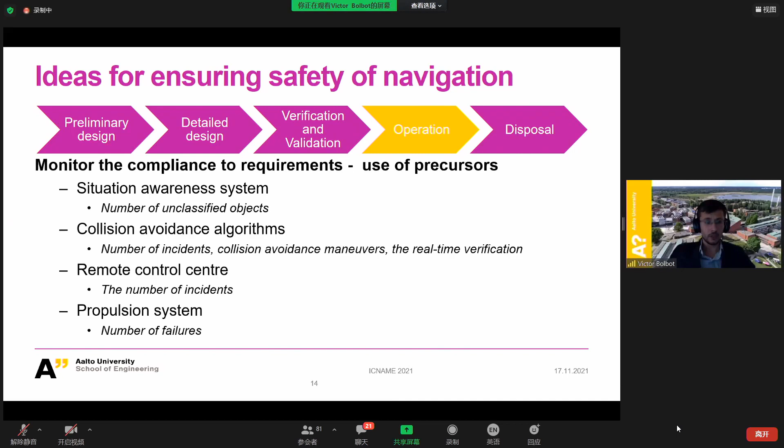It is also important to consider that since we are anticipating accidents to occur, we need to be ready for them. So in case of MASS, we need to develop emergency procedures, which will ensure that even if something goes wrong, then we will manage to come back and we will restore the health of the system.

Last but not least, we also need to take into account the recycling procedures. Since we are talking about software and information-intensive systems, it will be important to ensure that we have adequate procedures which would allow us not to leak some critical information about our system during the disposal stage.

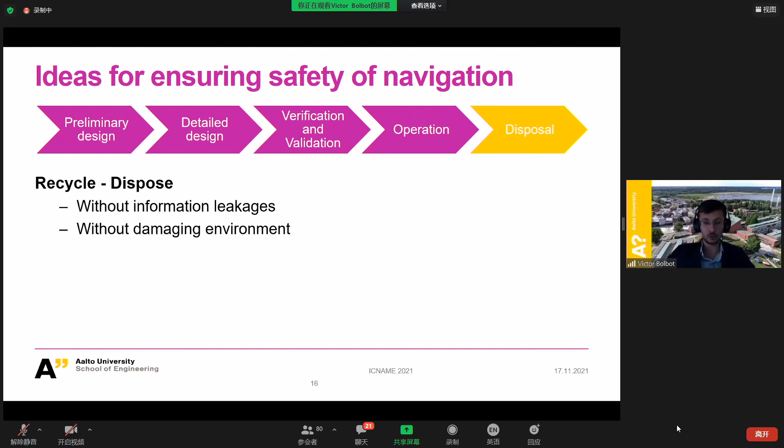So in the future, it would not be so easy to scrap the vessel, because if you scrap a vessel which has some critical information about the crew and the personnel, then maybe you will be sued by some people, who will be saying that you allowed their personal information to be leaked to third parties.

So just concluding, I would like to emphasize that not considering safety early during the design and during the life cycle will cost, and it is important to include safety in the different life cycle processes. And during the initial design phases, it's important to consider proper requirements and a complete set of requirements.

During the design, we need to follow up these requirements and to trace them. During the verification, we need to verify them and test to the adequate depth. During the operation, we need to check whether the requirements are actually followed by the design. And during the disposal phase, we need to ensure that critical information is erased from the ship system.